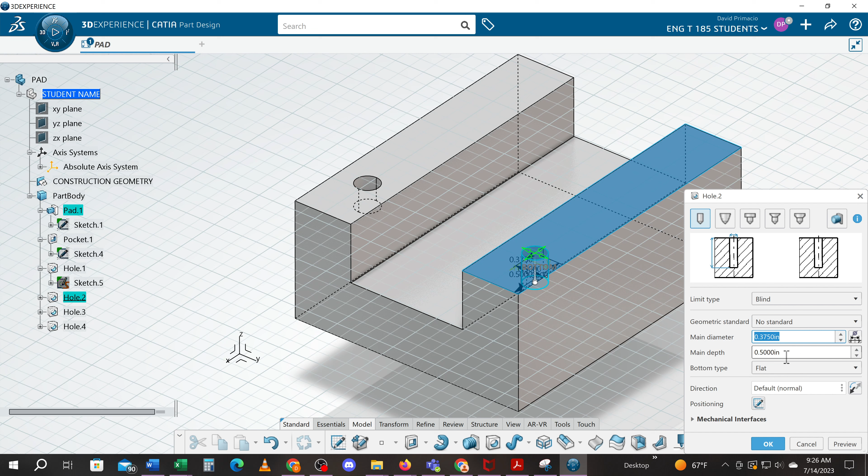Challenge yourself to see if you can modify this hole to match the dimensions of hole number 2. Do you recall what I said to do to change an existing part without having to delete it and start over?

Try this on your own. You can pause the video. If you can't figure it out, then continue to hit play and you'll see how it's done.

So to change hole number 1, I simply double click it. I don't have to recreate it. I just change those values.

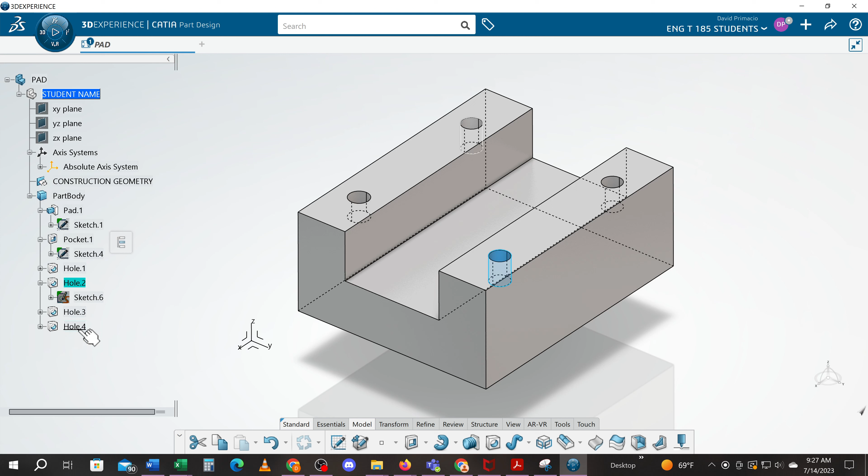So I'm going to delete holes 2 through 4 and show you how I created them. I'm highlighting them using the shift or control button, hit delete on my keyboard, select OK, and it will remove those holes.

This hole was the incorrect size. I double click it. Anytime you want to change anything in Catia, simply double click it, and you can change the diameter to 3 divided by 8, which is 3/8. If I hit tab, it will show me the 0.375 value. It converts it to decimals for me.

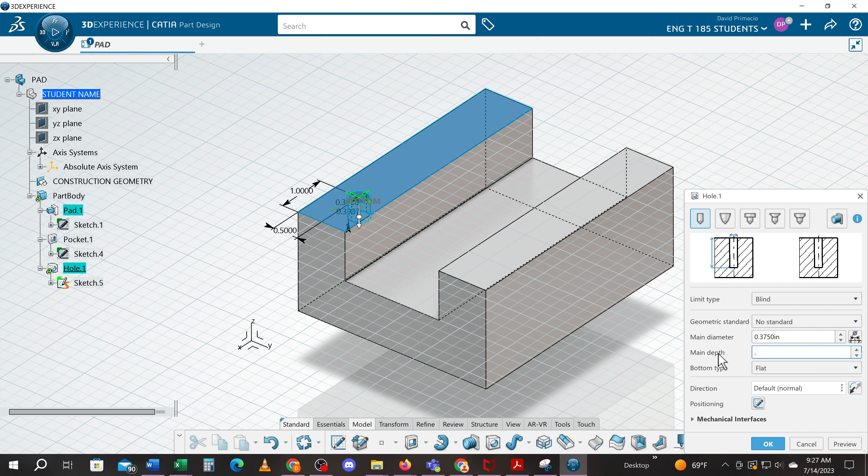On the depth, I want that to go a 1/2 inch deep, and I hit tab and select OK, and I now successfully modified the hole size and depth.

To add the next hole, you simply select hole, and remember, grab the edges you want to measure from. So I'm going to grab this edge and slightly rotate that, and zoom in and get closer to this part. I don't want to grab that line by mistake.

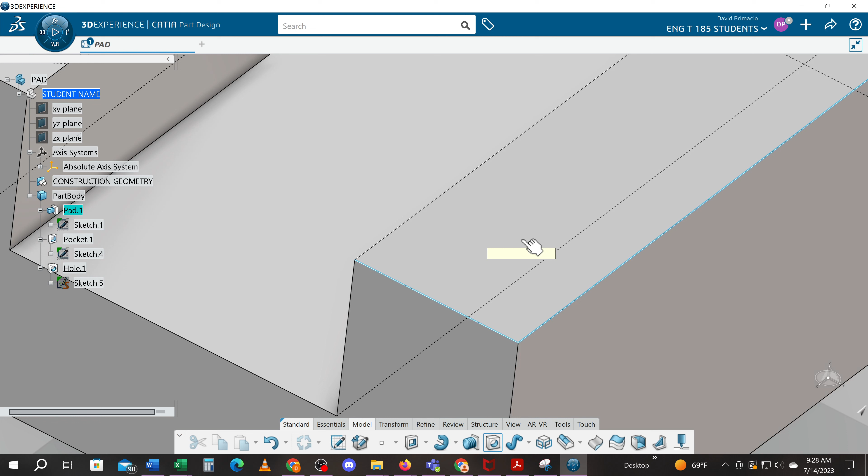I want to make sure I grab this edge, and then I'm going to make sure I grab somewhere on that face, and I'm just kind of going to guesstimate where the middle was, about 1 inch over. I'm just guessing. So this is 3/4 of an inch.

If I double click that 3/4 of an inch, I can change that to 1 inch in the pop-up window. And 0.503 - oh, I was within engineering tolerance already.

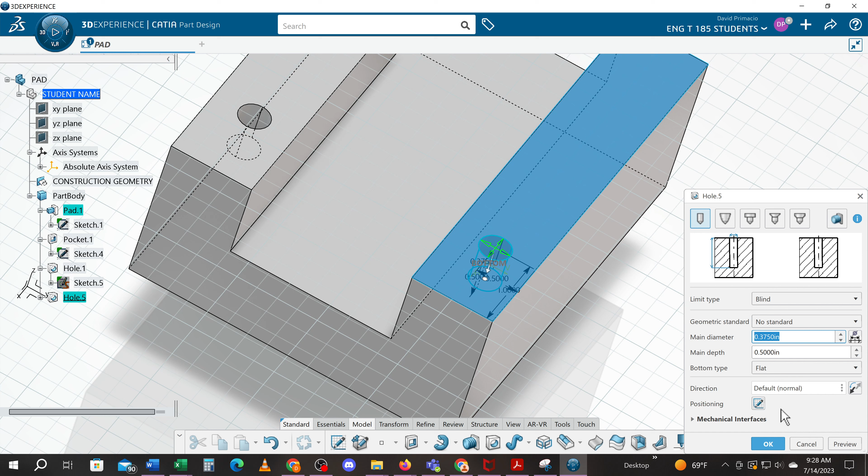I'll double click that though, and I'll make it a nice perfect 0.50, and select OK, and it creates the hole. It remembers the last parameters I used, so when I double click this, I can verify it's 3/8 and a 1/2 inch deep. So from here on out, all holes will be 3/8 and a 1/2 inch deep.

I will again demonstrate this one more time under holes. You simply grab an edge and another edge, then pick this face. Double click this and change this to 1 inch. I like to move this out a little bit.

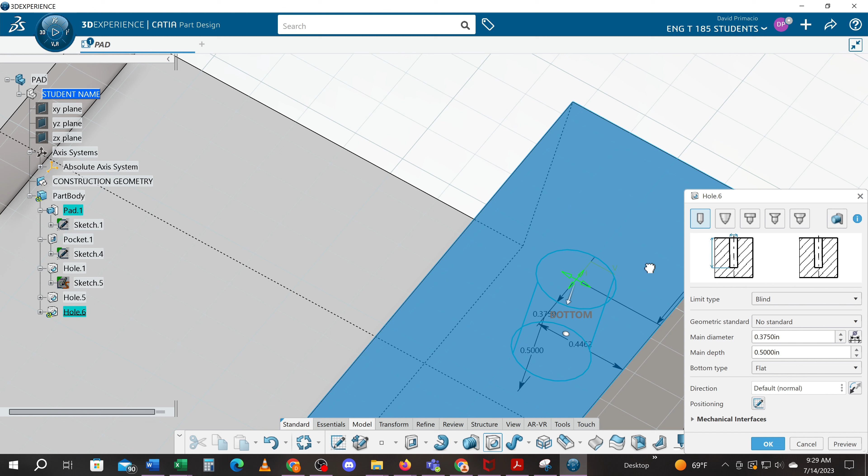Double click this. Sometimes you have to zoom in real close so you can see what you're doing. I'm going to grab that dimension and move it out here so I can actually work with it. I'll double click this and change it to 0.5, and select OK. Alright, and that creates that last hole.

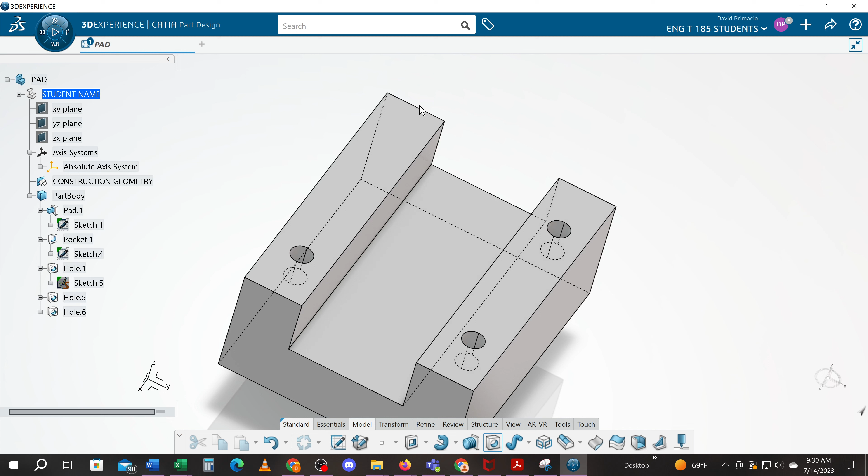Well, you know what, I said I'd demo it one more time, but we'll do it one last time. I'll show you how I did the final hole. I'll select the hole, select this edge, select that face, select this one here. Change this to 1 inch.

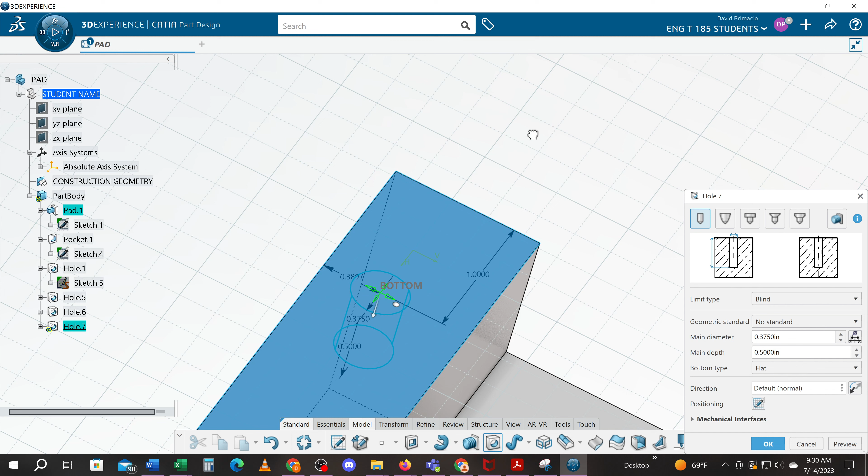Okay, and then again, it does not hurt to zoom up so you can actually see what you're doing. I'll move this dimension off this part so I don't click on anything else. I'll double click that and change it to a 1/2 inch. Notice again the diameter and depth are already set.

I select OK. I'm going to use my view tab to do an ISO view to reclock it, and then hit fit all in, and that is how this part should look at this point.

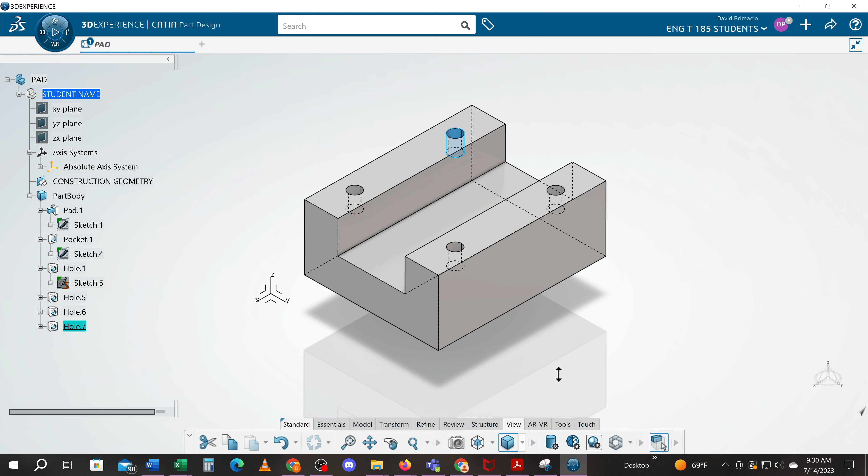Remember, I would save the part along the way, so you can hit your save command. Just simply hit save, and it saves by default to whatever collaboration you currently have active. That way you can always come back to this point if you need to. Alright, that concludes how to create holes.